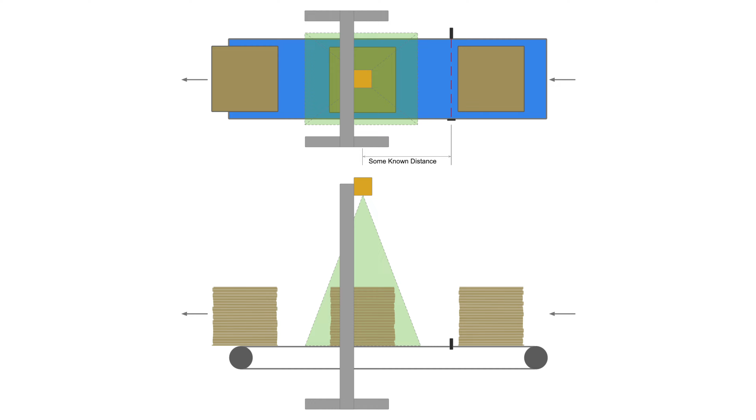Consider this: I want to detect the size, position, and orientation of a box in motion on a conveyor. I could use a couple of 2D vision cameras to do this, but what if lighting conditions are unpredictable? Or if the box has some multicolored printing on it making it difficult to detect contrast?

Remember this little guy? This IFM O3D304 sensor uses time of flight of infrared pulses to create a 3D point cloud, so I don't have to worry about lighting or contrast.

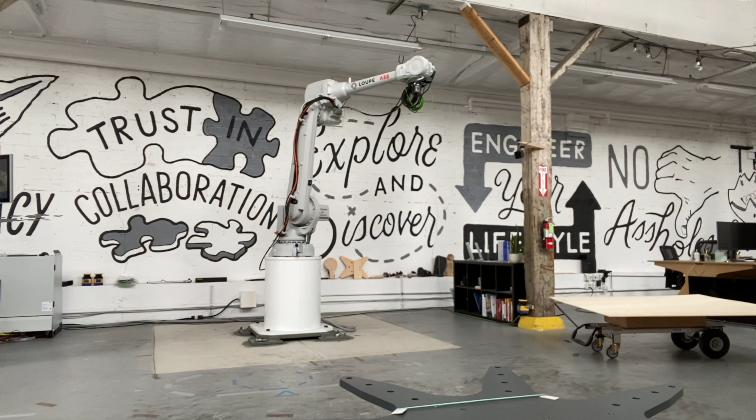The only question I have now is whether or not this camera, designed for static imaging, can give good results in motion. I don't have a conveyor and a gantry in my office to try this out, but I do have an ABB IRB 4600 with a ton of different brackets, so I put the camera on the end of the robot to move it over top of the box.

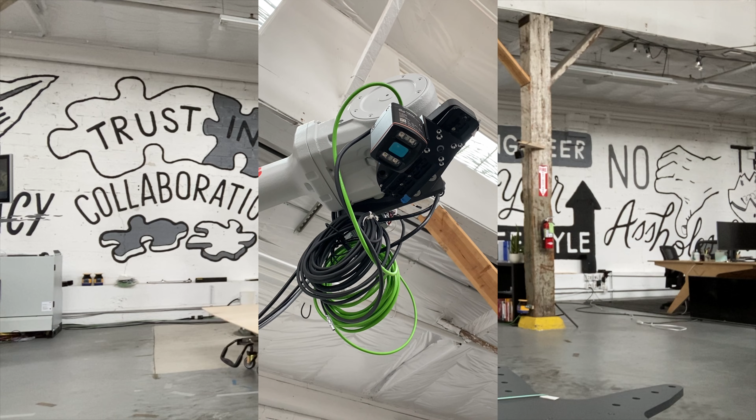I tested out the O3D's built-in dimensioning algorithm on a few different size cuboid shapes at various orientations using linear moves at speeds ranging from static to about 1800 millimeters a second along the camera's x-axis, triggering an image as soon as the robot crosses over the center line of the cell.

The model returns length, width, and position of the center of the box in meters and its orientation to the nearest degree. I expected the blur effect due to motion to be much worse than it was.

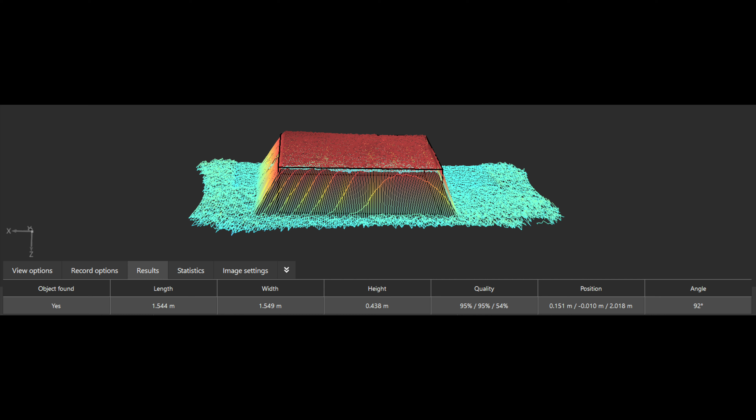The dimensions were repeatable to within 10 millimeters across the entire range of objects and speeds, which I think is pretty decent. Again, this camera is not designed for in-motion imaging, so as you might expect, the position of the box itself drifted along the direction of travel as speed varied.

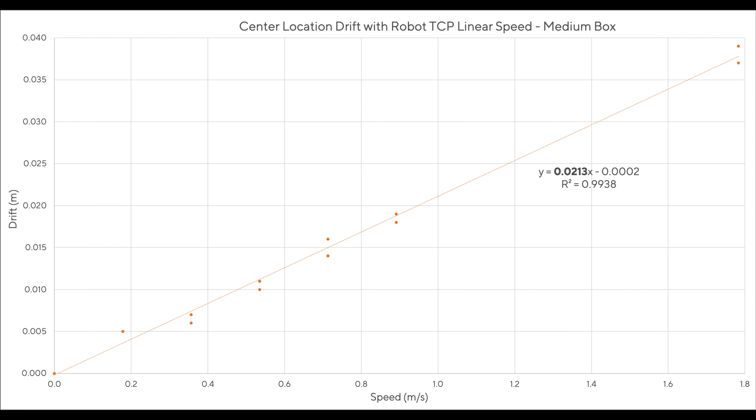I plotted out the x position over speed, and with some very basic linear regression with the slope representing a time delay, I estimated an additional 20 milliseconds or so that should be factored in when trying to better synchronize with other equipment. Now, I expect results on a real conveyor will probably vary a little bit, but in this low speed, low precision case, I was able to get good enough repeatability with the IFM O3D.